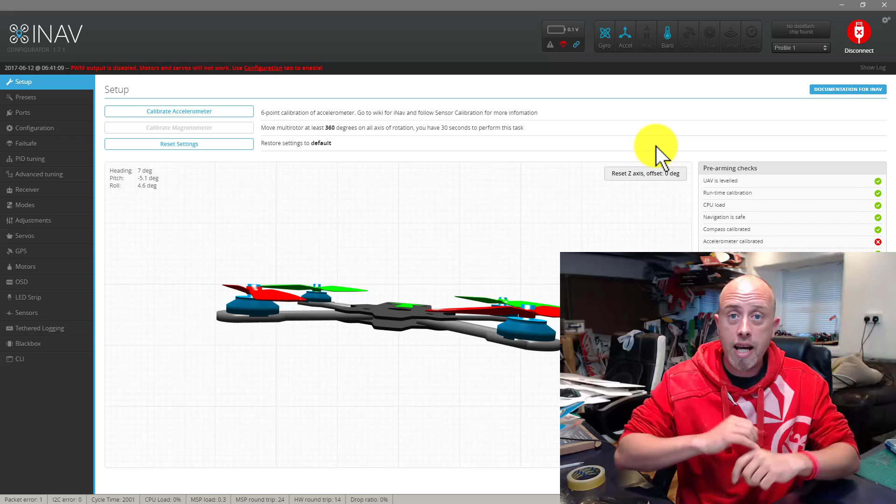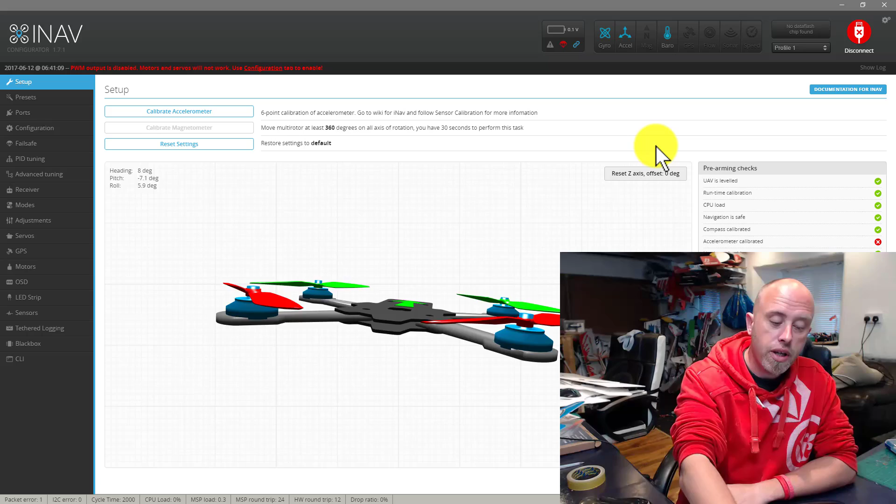So assuming that you have seen that part of the series, let's go and get the basic settings in for our flight controller board. Now, the first thing to note is that I've got the flight controller in front of me and I'm just unplugging it a moment. There we go. And you'll notice that I'm turning it around and you'll see that the picture of a quad is moving. Now, that picture does tell you which way the front of the board is. So let me just turn it around that way and point it down. There we go. That is the front of the board.

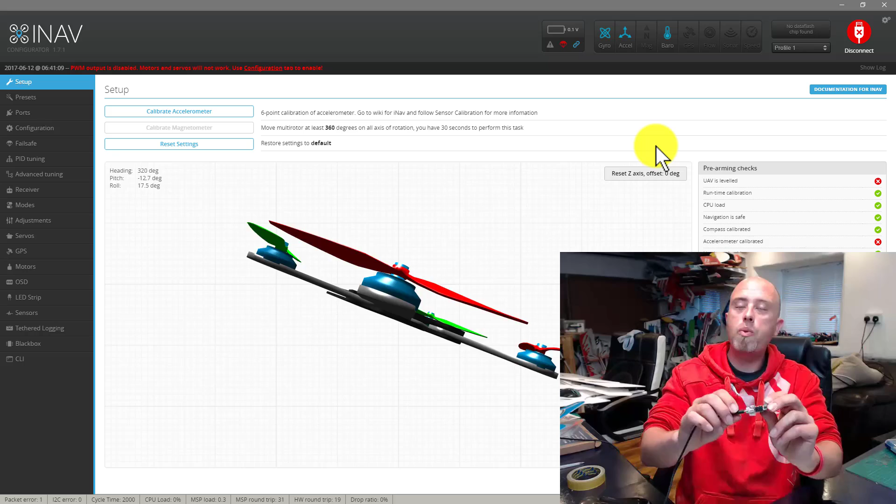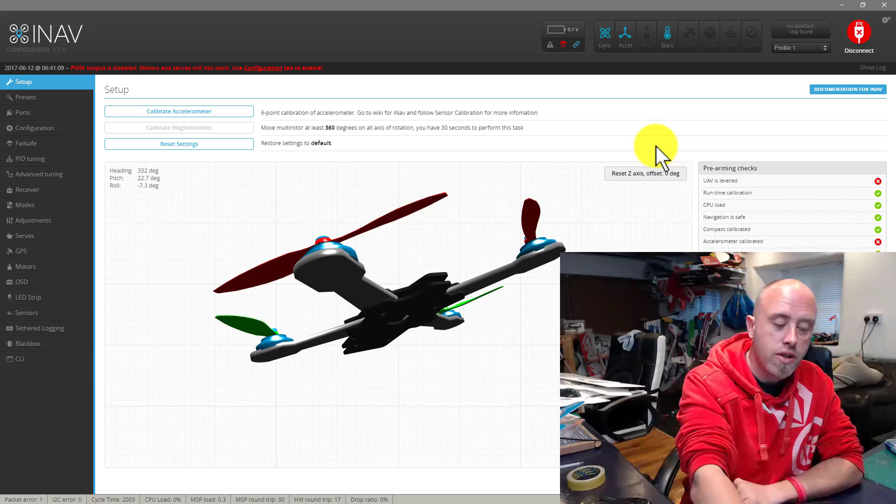Now, if you don't know which way round your board is, on 99% of the boards, the PWM pins point to the front of the model. If you're not sure, do check where you purchased your board from, and most of the time you will end up with an arrow pointing towards the front of the board on the actual flight controller itself. So let's put the flight controller down there. The main thing is that we're twiddling it around and it's moving on the screen. But it is showing a picture of a quadcopter and not a flying wing. And remember, this series is purely focused upon flying wings.

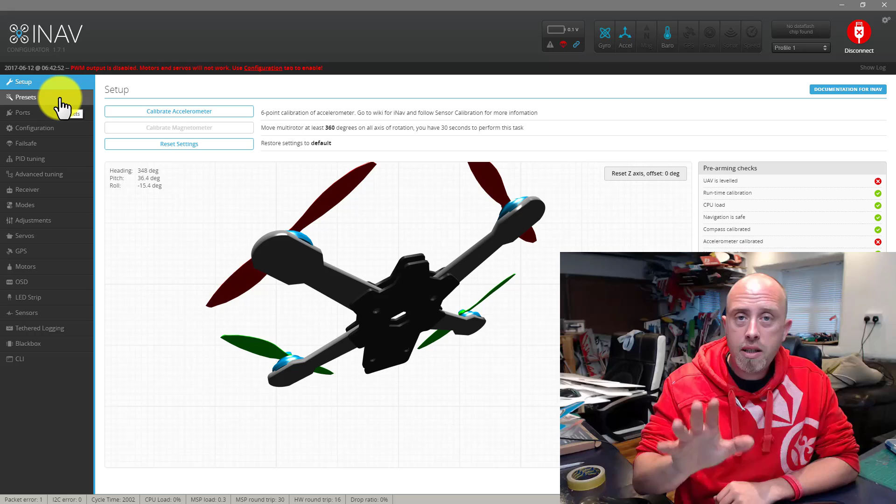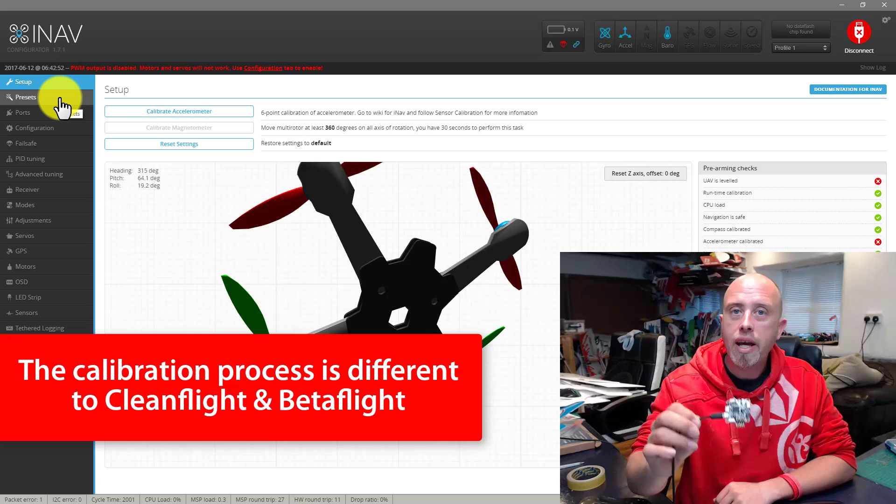So with that said, let's go into our presets on the left-hand side. Oh, actually, before we go any further, it is vitally important for me to point out that you will need to calibrate your flight controller. I will cover this with you in a separate episode. Do not skip that episode. I need to be 100% clear on that. You must calibrate your flight controller, and I will do a separate video for you in a later episode. So let me just move that down there out of the way.

Right, let's plow on. Now, a preset which I've had fantastic success with is the Flying Wing Z84. So a little Wing Z84. The preset for this model has worked really, really well for me, even in the big Skywalker Falcon. The Z84 is a little 600mm wing, okay? The Skywalker Falcon is a 1.2, 1.3 meter wing, and the settings have worked perfectly fine. So that's the preset which we're going to choose. I've selected Flying Wing on the left hand side, and then you click apply in the bottom right hand corner and then click on save and reboot.

Now the save and reboot, you're going to get used to this. It's going to happen lots of times during this episode. Brilliant. So let's click on reconnect, and you'll now see that the picture's been changed to a box instead. Okay, so we're getting there. Happy days. Let's go to the ports tab.

Now the ports tab, this top row where it says USB VCP, do not change that row. I'm going to color that in red on your screen. Okay, do not change the first row. That's the dangerous row. If you untick that option or do something with that first row, chances are you won't be able to connect to your board, and the easiest way out of that is to reflash iNav on it, so stay well away.

I'm going to untick MSP for UART1, okay, to make sure that is UART1 which we're unchecking that option for. And the reason for that is that if you're using an Omnibus F4 V1 or V2 board, we're going to use UART1 for our input connection for our receiver.

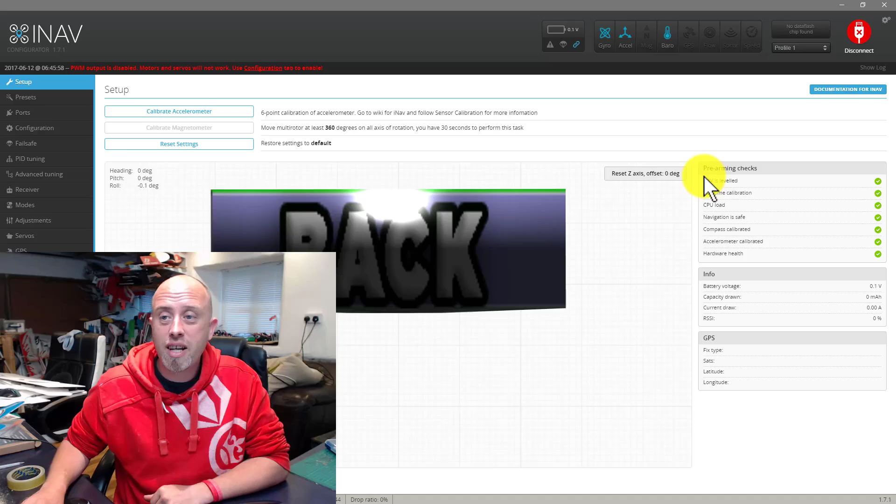Like I said, you're going to get used to this save and reboot process. We will be doing it many times. Right, we've done the ports tab. Oh, they both saved. Happy days. Let's go down to configuration.

Now you'll see that the mixer which has been set up is for a flying wing. Remember, this series is on setting it up for a flying wing. Obviously, if you're going to be using an aeroplane, then you would want to have chosen aeroplane and maybe back on the presets tab chosen the aeroplane version. But like I said, we are setting up our iNav flight controller board for a flying wing.

Scrolling down, now this may be a shock horror to some of you, but I'm going to change the barometer to none. The reason for that is very simple: the GPS units which we're going to be using with our flying wings, the Neo M8N ones, are absolutely fantastic. The GPS will provide a very good fix, and it will be able to tell your height and your direction and your speed and your location.

You can, of course, select to leave the barometer enabled, but personally, I would strongly suggest that you don't. In my previous interactions with iNav, the issues which I had seem to be all orientated around a bad barometer, and I would hate for you to have foam snow, so I am going to strongly suggest that you set the barometer to none.

Right, moving down, like I said, we are going to be setting this one up for S-Bus, and I will be using a FrSky X8R, so a couple of preemptive settings, and I will cover this in a separate episode, but I've chosen serial-based receiver and changed that to S-Bus. Obviously, if you're going to be using PPM, you just change that one setting to PPM RX input, and that's your job done for that section. I am going to enable the GPS while we're at it. Like I said, I'll cover that fully in a separate episode.

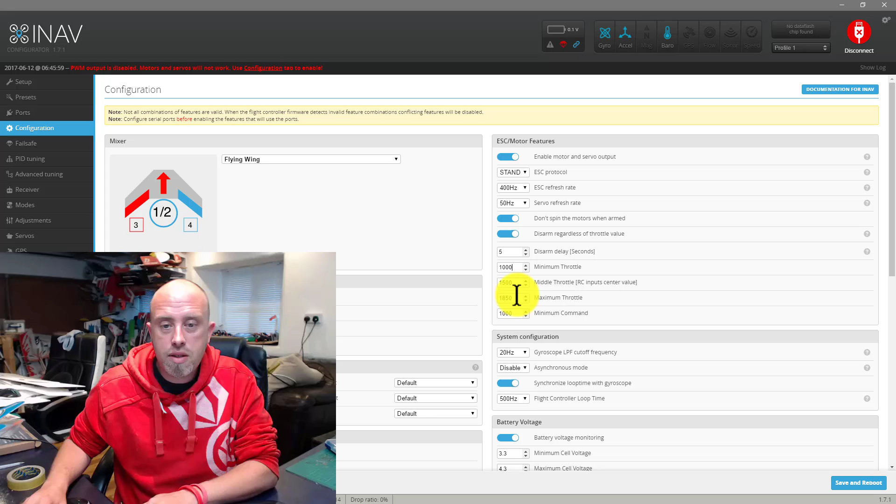Coming back up to the top, scroll up. I'm going to enable the motor and servo output. I'm also going to choose don't spin the motors when armed. By the way, those of you using normal servos, leave your servo refresh rate at 50 Hertz. Now, I always change this on mine. I change the minimum throttle to 1000 and the maximum to 2000.

Scrolling down. Now, one thing with iNav and flying wings and models, don't change your system configuration rates, okay? Just leave the frequency and the loops as they are. You're going to be perfectly fine. These boards in a flying wing or a normal RC model are absolute overkill. You do not need to change your PID loops, and that's a message aimed at you quad boys. You know who you are. You don't need to change the PID loops.

Scrolling down, now on the V1 board you have a battery monitor included. In the V2 board, which we're setting up right now, we actually have a current sensor, so I'm going to enable the current sensor. Now, where it says scale the output voltage to milliamperes, I'm actually going to change that to 740, and that seems like a big jump.

The reason for that is that I've actually calibrated a couple of the other boards, and 740 seems to be a really good value for me personally with the boards which I've got to get the current about right. I will show you how to configure and calibrate the current sensor in a later episode, but for right now, 740 seems to have worked really well for me, so that's the value which I'm putting in there.

And then scrolling down, I am going to enable telemetry output. Again, I'm using FrSky kit, and it's got telemetry in there by default. And the one crucial one, which you cannot skip because it will cause you fun later on, is to enable the OSD option at the bottom. Both the V1 and the V2 flight controller boards have OSDs built in, and we must enable that feature, otherwise we won't be able to upload the fonts.

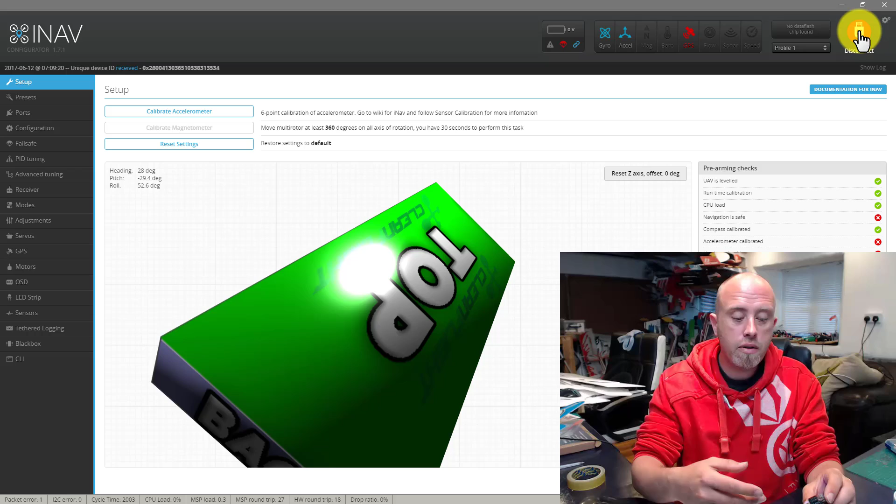Next episode, we're going to go and connect up our receiver. I'm breaking that into a separate episode because that does allow me to go and set one up for PPM as a separate episode for those of you who are going to be using PPM. I'm going to be setting mine up for S-Bus. After that, we've got the GPS. And then after that, we're going to jam on our ESC. We're going to go and connect up our servos and talk about the installation of our flight controller board into our models. We are on the home straight now, so this is classed as happy days.